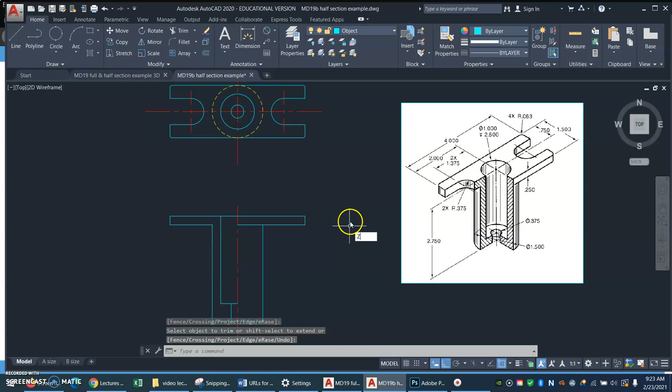Because I'm cutting right through the center of this part, I am going to need to show an edge. I want a quadrant. Shift, right mouse, quadrant. From that thing down to my flange, enter, and I will TR for trim. I'll use the top of the lip as my cutter, enter, and I'll trim.

I'm not going to show a hidden line for that thing over on the other side though, am I? No, no, no. Then I'm going to bring a center line. I'm going to get tricky and try and use my green ghost line. I'm going to bring a center line down here, and I'm going to select that line, which is on the wrong layer, and click center, so I move it to the correct layer.

So you see what's happening. Here's a center line. I have cut through the middle of that slot, so the back edge of that slot is visible. I have cut through this round stuff, so down here in the front, both the outside and the inside diameter will be visible, and half of that small hole will be visible.

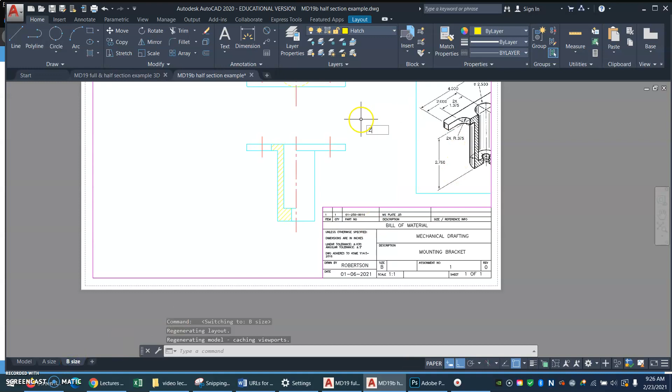Now I'd better go to my viewport and find out what my scale is going to be. So I'll double click inside my viewport. 1-to-1 is what I've got there. And it looks like that's going to be good.

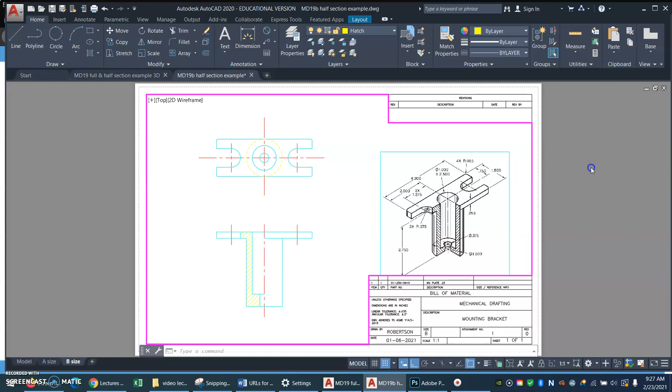I can get rid of my temporary picture here in just a minute. It looks like my views here at a scale of 1-to-1 are going to work just great. So when I set up my dimension style, go to the fit scale, I can leave it at a scale of 1 and everything will be good.

Okay. And for the depth of this hole, you could be sophisticated and call out the hole and its depth in the top view like he did, but I think a faster way for that hole depth, once I get on the dimension layer, would be just to dimension the darn thing here in the section view.

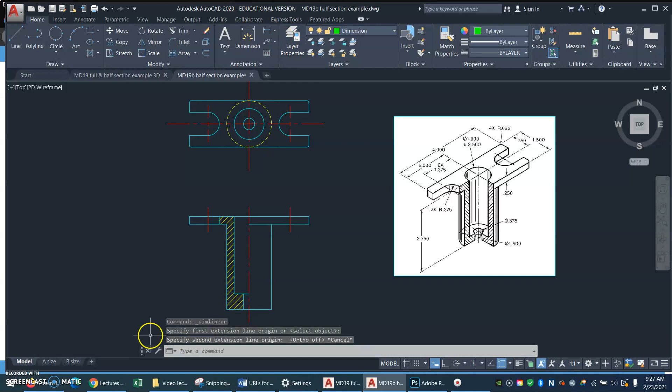And once again, notice what I'm doing. Let me zoom in a little bit closer while we're talking about dimensioning. I'm going to get my dimension, and if I couldn't find it, I could click down this. Mine was on a diameter dimension and I couldn't see the one I wanted, so I clicked that dimension list and I found linear. That's the one I want. Not aligned. That will be a problem. And I'll show you why.

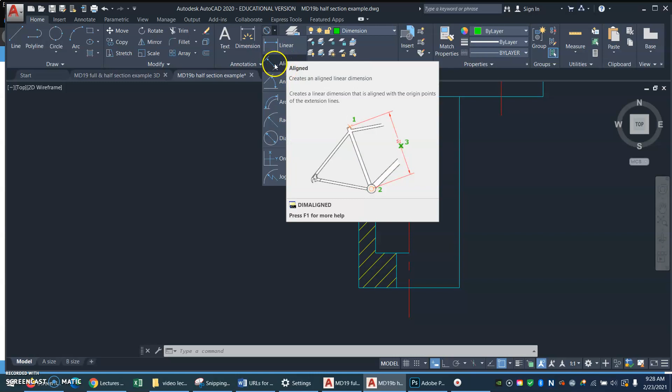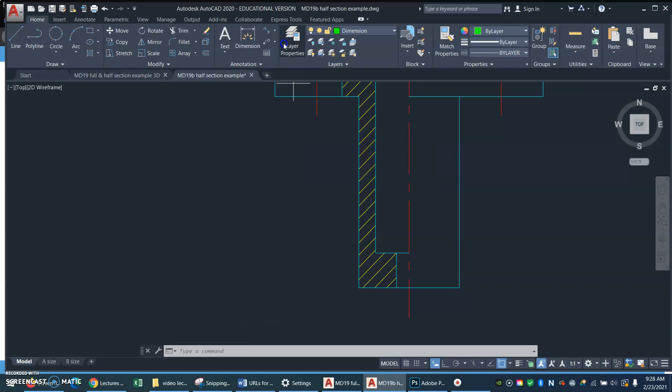I'm going to go off on a tangent for just a second here. Here's what's wrong with aligned. If I click this corner and this corner, it's going to align the dimension with the 2 points I clicked. That's not what I want. So I want linear right there. Horizontal or vertical, thank you. And I'm going to click on the 2 corners that I'm interested in, even though they're not lined up. There's that inside corner and that outside corner. And now I could go down or I could go over, and I'm going to go over.

And then I do also want a height dimension to the underside of my flangey thing. Looky there, looks good. And I probably want a thickness on my flangey thing, which I could put on either side of the part. Now, for other dimensions,

this inside diameter, I'm going to have to dimension in the top view because I do not have an entire diameter down here to put a dimension on, do I? I only have a half of an inside diameter and a half of a small hole. So those are going to have to come up here in the top view. And I could put those wherever I need to. There's the 1-inch one. And now let me click the diameter dimension again. Select the circle, got it, and bring that over here. I'm going to try to line up with my other dimensions so I look professional.

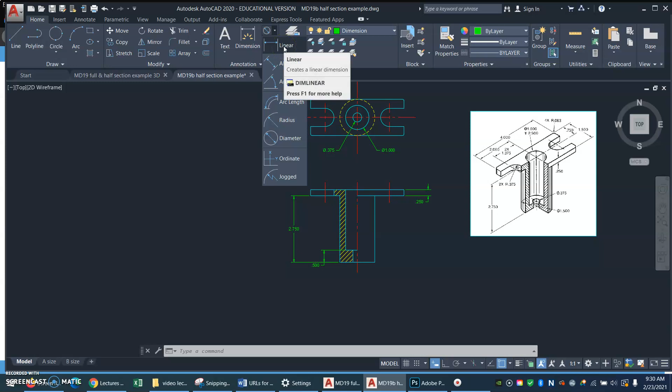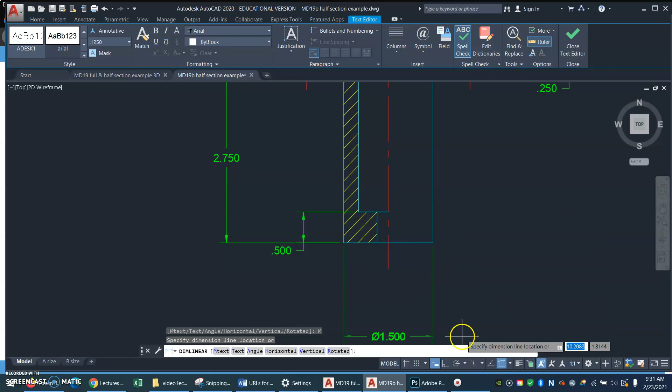Now the outside diameter I cannot dimension in the top view because it's a hidden line in the top view. So getting my linear dimension, this is the annoying part of diameter dimensioning in my opinion. I need a linear dimension so that I can click the outsides of my round thing. But now what makes me cranky is that now I have to go M for M text to edit my dimension text and either go up here and get a symbol, or if I remember what to type, looky there, %%C, I could have just typed %%C. And now that's good. I can just click now, or I can click Close Text Editor. And now my rubber band is stuck to my cursor, and I can drop it where I want.

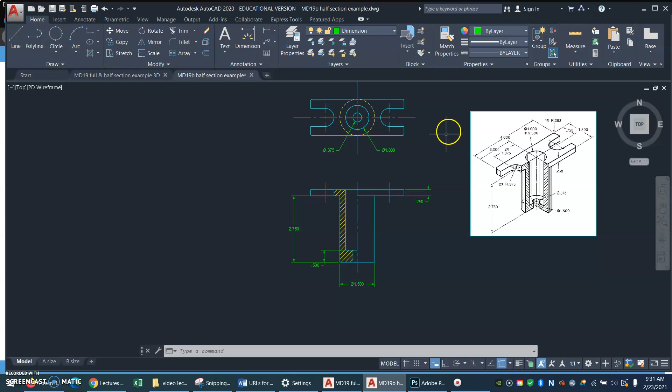I do not need any cutting plane lines because I have cut my section on a center line. I do need a bunch of other dimensions. I don't want you to think I'm done here. And this middle center line is a little bit excessive, I grant you. That's left over from when I was laying things out. Okay, I do need, in the top view, the location of the center line. So I'm going to go from one outside edge to the center line, plus I need the overall width, so from one outside edge to the other outside edge. That has completely located this centery stuff in the middle of the part.

Now, what else? I need two other radius dimensions. Let me click down my list of stuff here. There's my radius dimension. I need this big one. And here I need to do M, enter, because I need a 2 times, don't I? Okay. Here's another thing I find annoying. I don't like that extension line that it brings up when you do a radius. That's new in the previous 1 or 2 versions of AutoCAD. I don't know how to get rid of that. I often just do a leader line for a radius, to be honest with you.

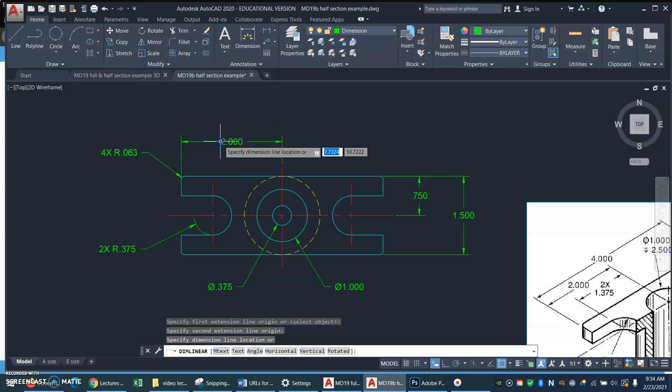And then I'm going to get another radius command again and click on this little outside corner, which is 1/16 of an inch, and I'll do M, enter, because I need 4 times space. Click. And I'm going to try to line that up with my other radius dimension. That's what makes these look professional. Woohoo! And I need, this one needs to be a little bit, I'm running out of time on my video thing here. I just want to say I really need this dimension right here, and I really need this dimension right here. There. I think I'm done.